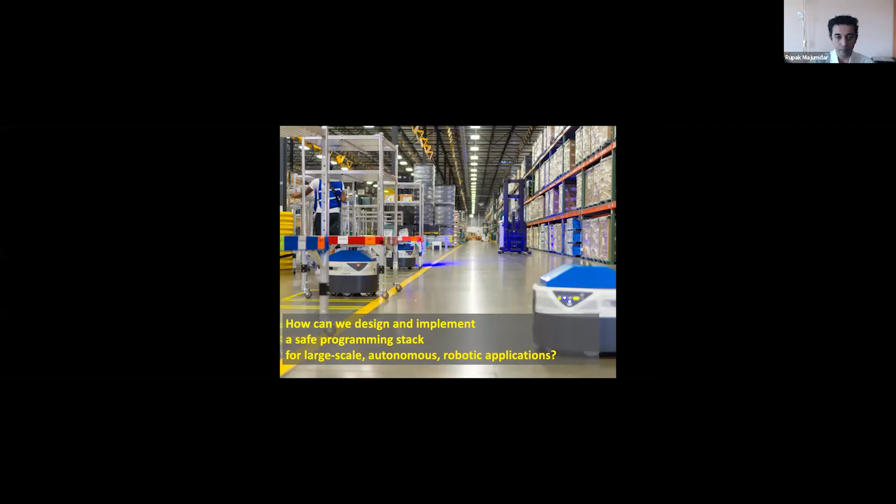So the problem that we want to look at is how can we design and implement a high confidence and safe programming stack for large-scale autonomous robotic applications. This is a rather long-standing challenge in many different communities.

There is this very influential paper by Tomás Lozano-Pérez from 1983, where he claims that one of the great challenges in robotics is to provide programming abstractions that allow the versatility of robots to be exploited easily. He ends his paper by stating that we do not have an understanding of the basic issues in robot programming. And what I would say is that even after 40 years, we still do not have adequate understanding of programming and reasoning support for these autonomous robotic systems. But what I would like to convince you in this talk is that over these years, we did make sufficient advances towards this grand challenge.

So even though we haven't solved this problem entirely, we have made considerable progress. And by the nature of these talks, I shall provide a rather biased view that will feature the work of my group. But of course, there's a very large community working on all of these problems.

Just to show you the kind of examples that we can now verify, let me give you a couple of examples of some simple robot coordination protocols we have implemented in the lab. So here, essentially, there's a cart that's carrying blocks of different color to different robots. As a robotics example, this is not particularly exciting, but what is exciting to me is that this entire code is actually formally verified.

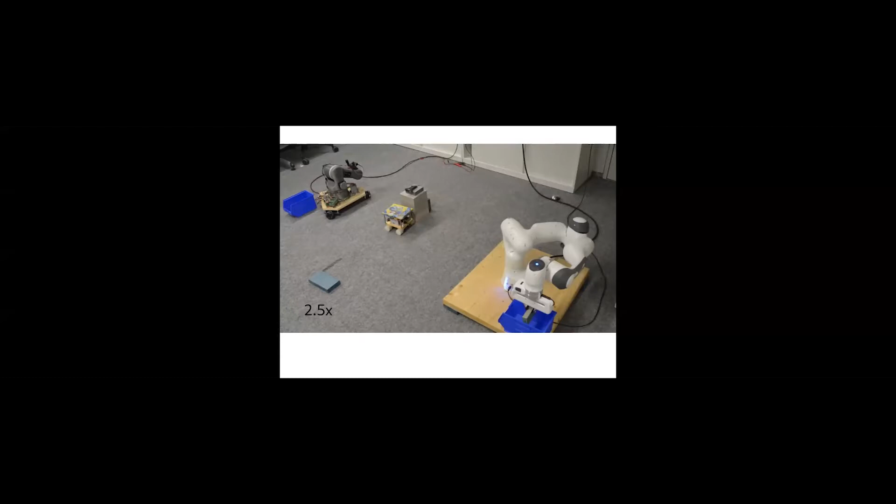But people are asking whether you could enlarge your screen because it's relatively small. Let me try. Is this any better? Didn't change for me - it's relatively okay, but I saw some people complaining. Let me stop the sharing and try one more time. Okay, absolutely, no big deal. Does this work any better? Much better. Yes. Thanks.

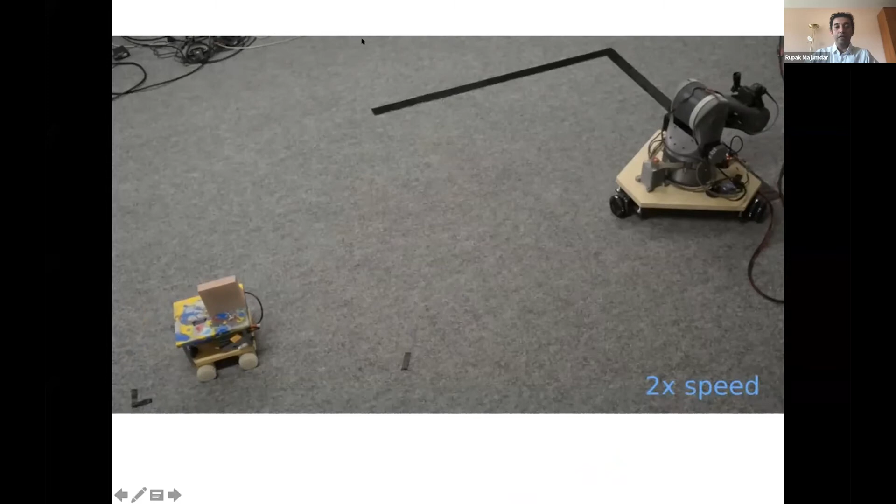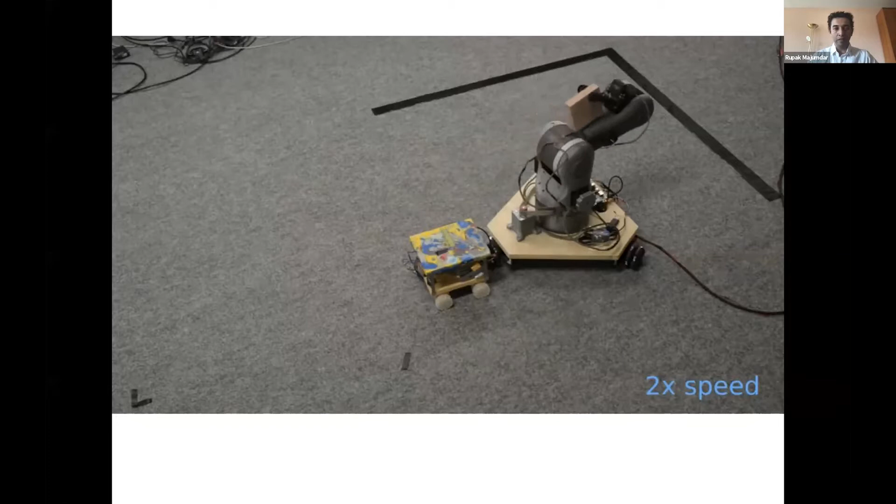Okay, so here's a second example, again a very simple coordination where two robots meet somewhere in the middle and transfer a certain block from one cart to another one. Again, in terms of concurrent robotics, these are not very complicated examples, but considerable work needs to be done in order to verify these simple coordination protocols.

Now, before we go any further, I want to mention that this problem of understanding and providing a formal foundation for robot programming is an extremely interdisciplinary topic, in the sense that we need to put together many different ideas from many different disciplines - from continuous systems theory or control theory, to computer science and discrete systems theory, ideas such as automata and logics. As you will see, we also look at programming abstractions and concurrency theory. And finally, I will give you some examples of software engineering and human-robot interaction that come together in making progress on this problem.

So essentially, this is a rather interdisciplinary topic, and I apologize in advance if I lose some of you in some parts of the talk. It's really a struggle for me as well in trying to understand all of these things and how they come together.

Now, when we talk about formal foundations, essentially we shall look at three different things in this talk. We shall look at reasoning about dynamics, reasoning about coordination, and to a lesser extent, reasoning about resources. And when I say reasoning, I will take a computational lens. Our goal is to provide an algorithmic framework for the design and analysis of these systems.

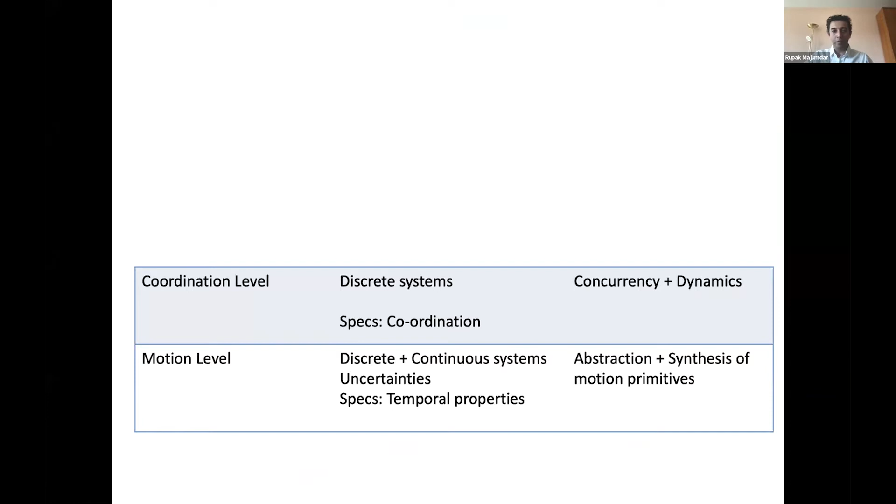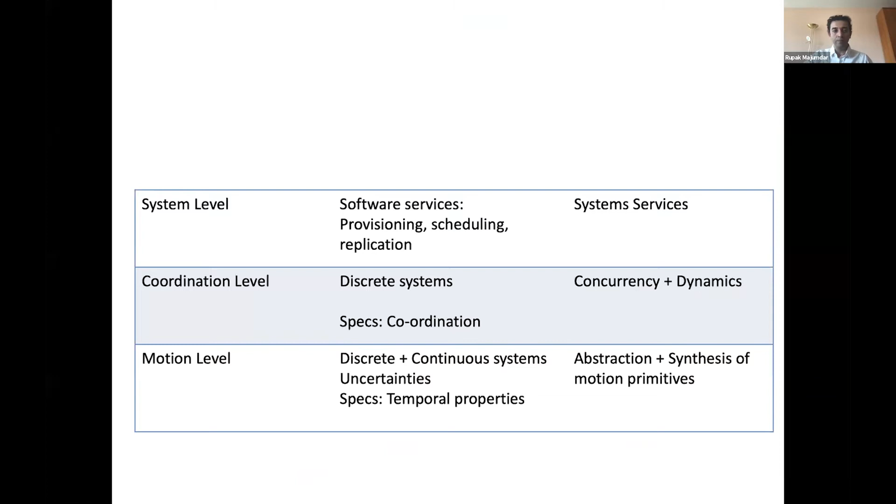Now, when we go further up, we shall look at multi-agent systems. And these systems will not just work in a vacuum. We shall look at software engineering and systems design issues such as provisioning, scheduling, and so on. And finally, if time permits, we shall very quickly look at certain user interaction issues and how end users can use these systems in a more effective way.

So most of my talk will actually focus on the bottom two levels, mostly because we have made more progress at these two levels than the other ones. But I will give you a very brief introduction to what we have been doing at the other levels.

And I shall structure the talk in terms of 4 projects that we have been doing in my group for the last few years. Mascot is an automatic controller synthesis tool. PGCD is a programming framework for concurrent robots. AntLab is a task assignment and planning system for robots. And LittleTalk is an end-user programming by example system.

Okay, so let's start at the lowest level. I shall talk about automatic ways of designing controllers in the presence of continuous and discrete dynamics.

Now, the controller synthesis problem is probably familiar to many of you. So you're given a model that is, let us say, a continuous state, continuous time dynamical system given by a differential inclusion. And there is a nominal or unperturbed dynamics, but we also assume that there is a bounded external perturbation. So we have some state space.

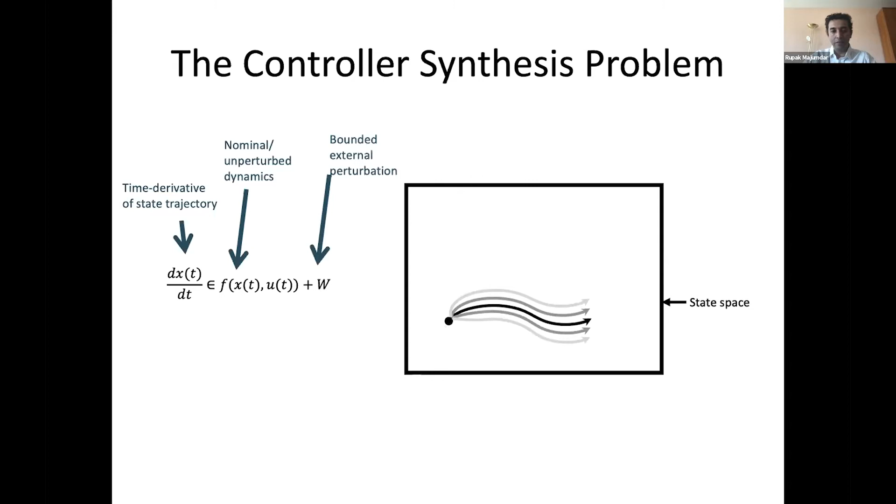Let us say it's a compact state space. You have a certain point, and under the effect of the external disturbance, the system essentially gives rise to a set of trajectories.

And what we'd like to design is a controller that takes a state and produces a control input to this dynamical system, such that the trajectories of the system under the influence of the controller satisfies a certain specification, which is usually in our context given by a temporal logic over the sequence of states.

And our goal is to find a controller domain, or at least a good approximation to this controller domain, such that from every state in this controller domain, if you apply this controller, then you ensure that every possible trajectory, even under this bounded external perturbation, will satisfy the specification.

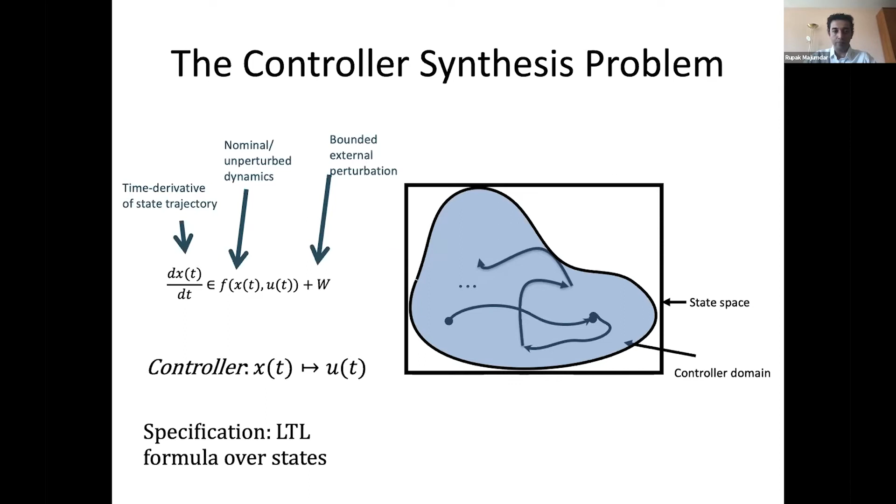And again, the goal is to find a controller such that the dynamics that you get under the controller, even under the disturbance, will eventually reach the target, and it will never hit the obstacles. And our goal is to, again, find the set of states from which such a controller exists.

And another very canonical example is safety, where again, you're given a dynamics, and the goal is to come up with a controller such that the trajectories always remain outside some set of bad states. And in general, we can look at any omega regular specification or things given in linear temporal logic, if you're familiar with such logics.

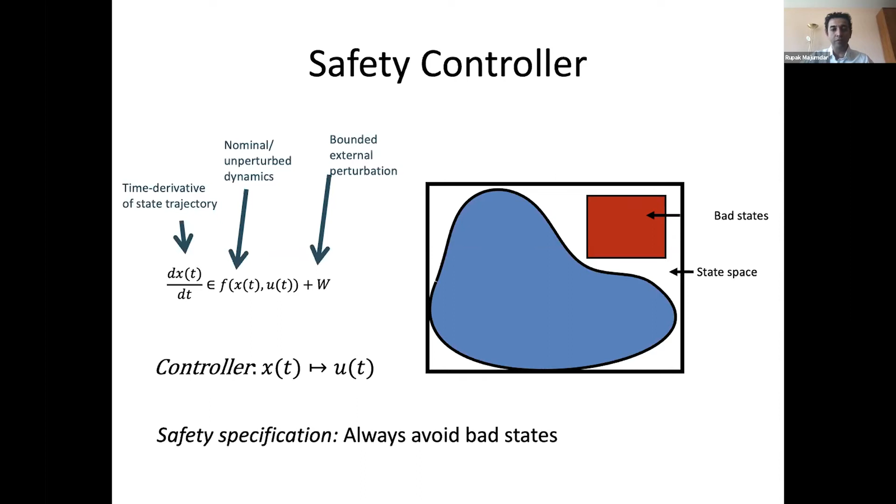Now, the core technique that we use is by now quite familiar in the community. This is something called abstraction-based control design. This came out, I would say, from the HSCC community, from the intersection between computer science and control theorists about 15 to 20 years ago. And by now there are some excellent textbooks, by Paulo, by Calin, by Sayan, that essentially talk about abstraction and control design in various ways.

So ABCD starts with the continuous state dynamical system. In general, it can be both continuous time or discrete time. Here, I've just given a discrete time description of the system. And what ABCD does is that it first computes an over-approximation of the dynamical system on a finite state space.

So the simplest way of thinking about this abstraction, this finite state space, is that you put a grid on your continuous state space, and then your finite state space is given by the cells that make up this grid. And then through a process of abstraction, what we do is that for every center point of every grid, that is for every state in my finite state space, I construct an over-approximation of the underlying dynamics.

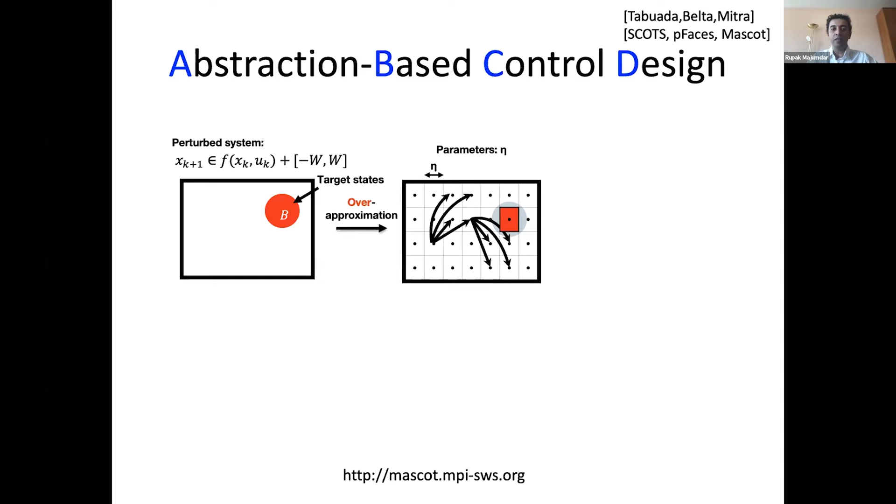So in this picture, if you start with any one of these dots and you follow the arrows, what we can say is that if the underlying continuous state system takes one step in its dynamics, then under the effect of the disturbance, the possible states would be any one of these discrete cells that these arrows point to. It's an over-approximation of the possible states that you could visit in one step of the underlying dynamics. And this abstraction is characterized by a parameter that says how fine your discretization is.

Now, it turns out that there is a different way of thinking about this abstraction, and this is something that is called a two-player game. It's a two-player game between the controller and the disturbance. And you should think of it in this way: the states of this game are the discrete abstract states that we have computed in this abstraction.

And from any one of these states, the controller can decide to play any one of its control actions. We shall also discretize the control space in the same way that we do the state space. And then an adversarial player, the disturbance, essentially resolves the disturbance and figures out which new state the game ends up in.

And now it turns out that the reason we go to these two-player games is because there's a lot of theory from the world of reactive synthesis and automata theory that tells us how to compute strategies that win against omega regular specifications on discrete two-player games. So essentially what we can do is apply these algorithms, and we can essentially find a winning domain of the controller on this discrete abstraction.

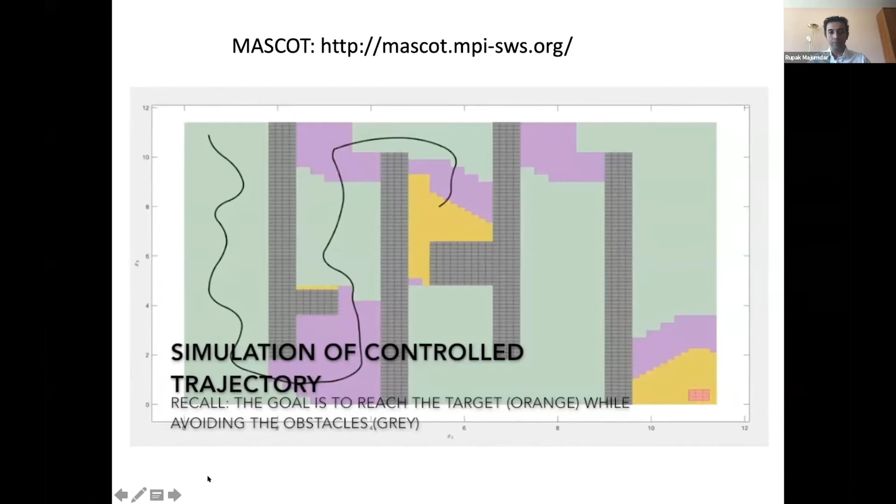Let me talk a little bit about some very recent work we have been doing in applying the same ideas to stochastic models. Here again, the problem is more or less as before: you're given a dynamical system.

So you're given a dynamical system, which is continuous state and either continuous or discrete time, and you're now given a perturbation that is stochastic. Again, our goal is to find a controller that looks at the state and produces an input. We are given a specification, which is again a linear temporal logic formula over states.

Our goal is to now find a tight bound on the satisfaction probability of the specification. Since the system is probabilistic, we cannot guarantee all the time that a particular specification will always hold on all trajectories. But we can ask, for example, can we find a controller such that the specification holds almost surely? Or can we find all those places from which the controller ensures the specification holds with probability greater than, let's say, 90%.

Now, the way we handle this problem is we essentially look at the special case of almost sure satisfaction. So what we do is find a controller domain from which there is a controller that ensures the system satisfies the specification with probability 1. And then we run a value iteration like algorithm to compute the probability that we can reach that set of states.

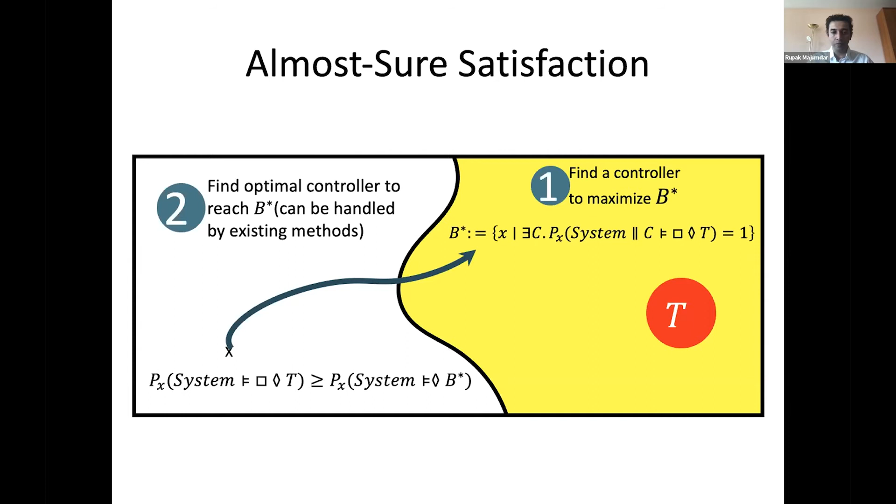Essentially, we can show that if you compute this region and then do a reachability analysis, what you get is a lower bound on the probability of satisfaction of this formula. And again, what we can do is take the basic ABCD algorithm and essentially massage it to deal with the stochastic case as well.

The way we do this is that instead of maintaining just one abstraction as before, which was the over approximation of the dynamics, we now need to maintain two different abstractions: one which is an over approximation of the dynamics, and the other is an under approximation of the dynamics. There's a technical reason why you need both, because of the way probabilities work.

Once you have these two abstractions, you can again go to a class of games for which we know how to solve omega regular objectives. But this time, the game you get is not a 2-player game as before. You get what is called a 2.5-player game.

These games have been studied in the automata theory literature for some time now. The idea of a 2.5-player game is that you have two adversaries as before, the controller and the disturbance, but in addition you also have nodes that are random. So in that sense, 2.5-player games generalize Markov decision processes to the competitive setting, where you have the controller, the disturbance, and also a probabilistic player that decides where to go next based on a probability distribution.

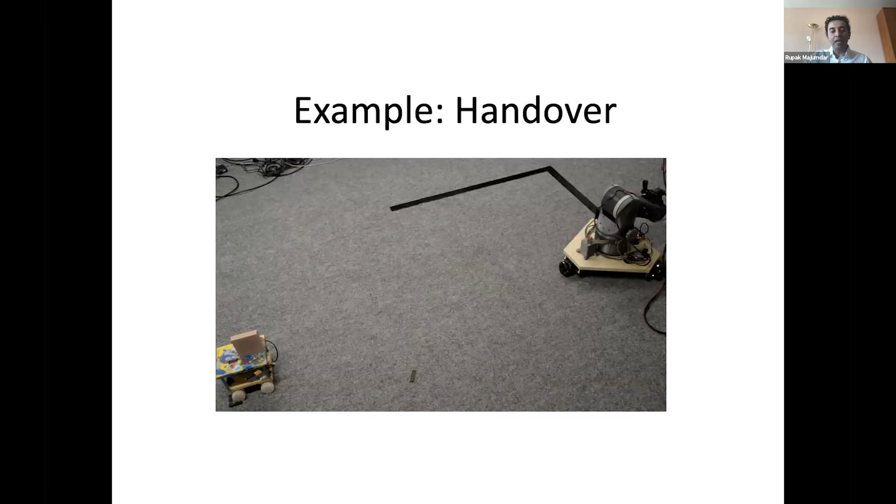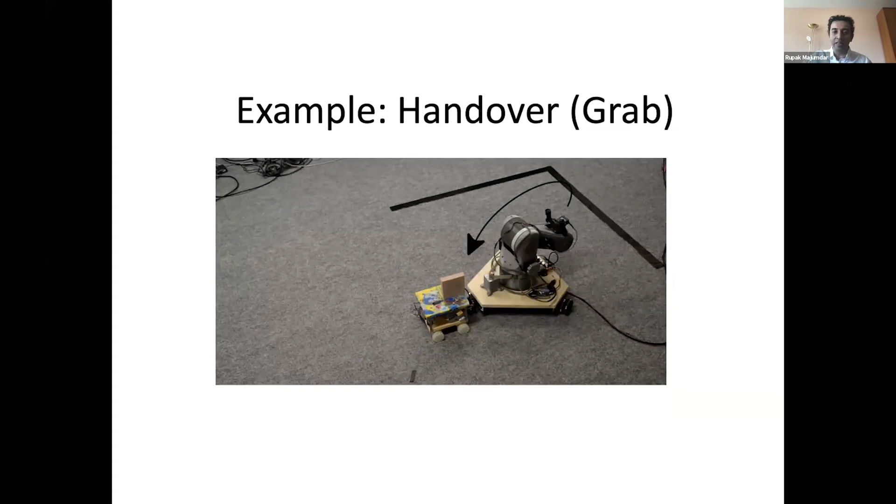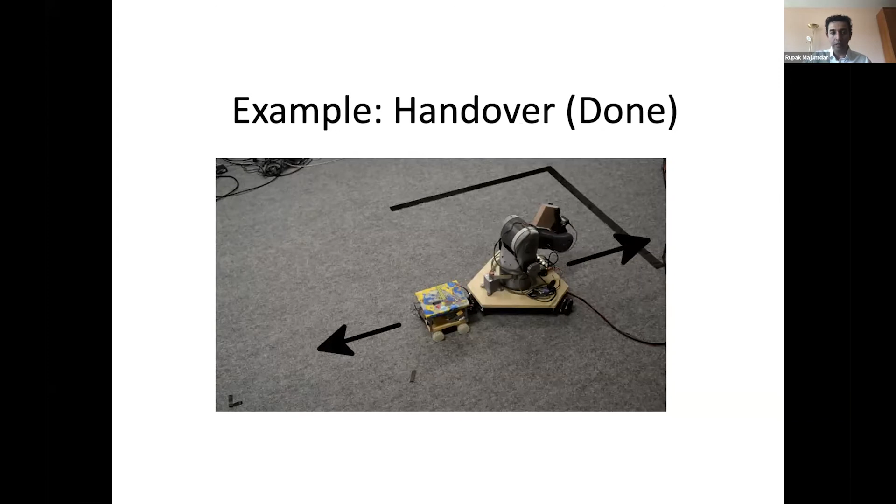Going back to the handover example we saw in the video: it shows this connection between motion. The two carts moved towards each other, coordinated, stopped next to each other, and then the arm came and picked up the object. Once the arm was done picking up the object, they went back to moving away from each other.

So essentially, the run of this kind of handover program, and many other programs where several robots are interacting, has the following form over time: they send each other messages for coordination, and between the messages, they execute motion primitives that cause global time to progress. You can think of these motion primitives as a dynamic controller that you may or may not have designed using abstraction-based control design.

But there's an additional aspect of making sure these messages and synchronization happen in the right way. In our model, we assume messaging is synchronous and reliable, and takes zero time, as does any other computation. The only way time can progress is when these motion primitives are executed. Because we're looking at multiple robots, each has essentially coupled control dynamics, so the dynamics of the cart can be affected by the arm sitting on it. The difficulty in the verification problem here is dealing with motion alternating with these messages.

So the unit of software in PGCD is a process, and a process has two aspects: the physical aspect of the robot, and the software. The physical aspect talks about the physical state maintained by this robot—for example, the position and velocity of the cart, as well as its mass, and the mass of an object sitting on it.

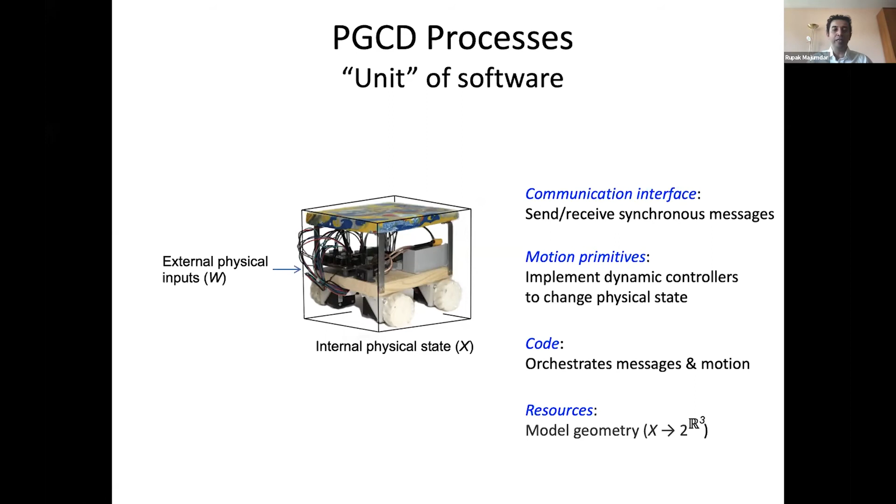So the code that runs on this component will orchestrate the message and the motion. In addition, we also carry around the geometry of the robot, a resource we track in our verification. The geometry is used to make sure two robots do not collide in geometric space.

Now, PGCD takes a rather abstract view of the underlying controlled dynamics. Essentially, this is the classical program analysis or program verification perspective, where we think of each motion primitive as summarized by its precondition and postcondition—under what states this motion primitive can be executed, and what happens after it has executed.

In addition, it carries around an assumption on the physical state variables of the environment that affect this controller, and gives a guarantee on what the external world can rely upon while this motion primitive is being executed. There's also the footprint and the duration: the footprint carries the geometric space required for this motion, and the duration is needed because at some point we want to reason about the interaction between motion primitives and messages.

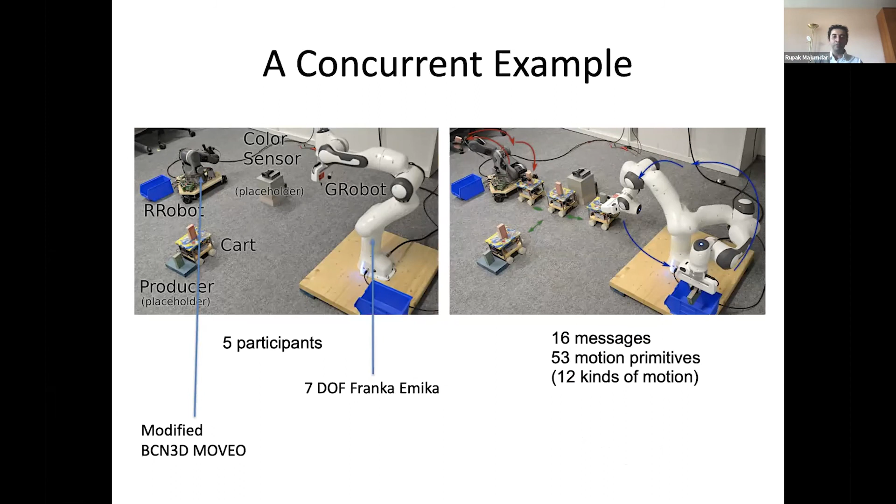To show the complexity of this coordination, there are 5 participants, including some robot arms we bought and others we built in the lab. The coordination had 16 messages and 53 motion primitives.

The whole point is to show that the annotation burden isn't very high. We have to give specifications of the motion primitives as well as write down the global type, and we can automatically verify this on top of an SMT-based verification condition generator and verifier. Most of the time goes into the joint compatibility checks, partly because the geometric reasoning requires nonlinear arithmetic, and that's where the SMT solver really needs to do some work. But the typing and syntactic checks are really minimal in the whole verification process.

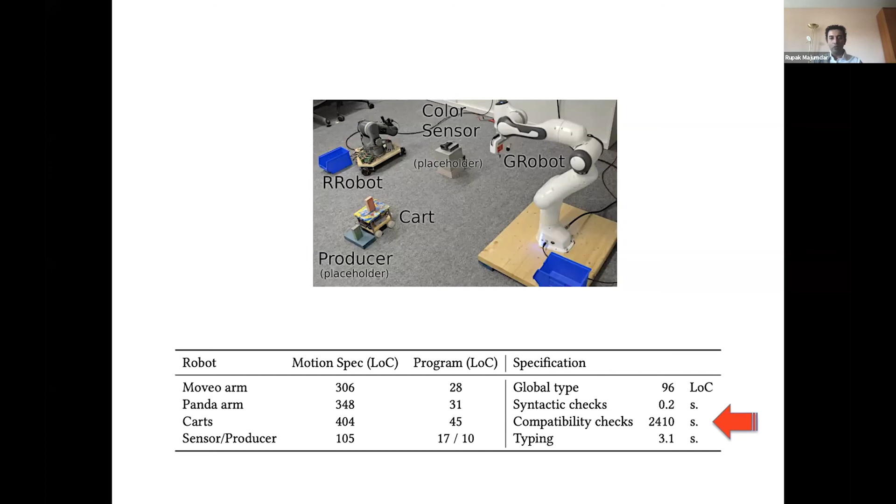I'm going to move to the last part of the talk where I'll briefly talk about the rest of the projects, but let me stop and take a couple of questions now.

So Paritosh asks about the scalability-expressivity-annotation trade-off. Instead of doing a completely automatic model checking on the entire state space, we ask for type annotations and also for pre/post assumes and guarantees for the motion primitives. This isn't always easy to give, but that's the trade-off. We're scaling to somewhat complicated examples because we're asking the programmer for help with these motion primitives and global types, and we're using session types, which are sound but not necessarily complete. So it's possible the session types will reject a program that is actually correct.

Manuel asks, why not use timed automata for the planning of messages and actions? We went for the type view because we wanted a compositional way of looking at the system, and the types came with a compositionality result. Whereas for timed automata, we'd have to somehow come up with a way of doing this projection on timed automata—it looks rather interesting, but I don't know offhand how easily we'd be able to do this.

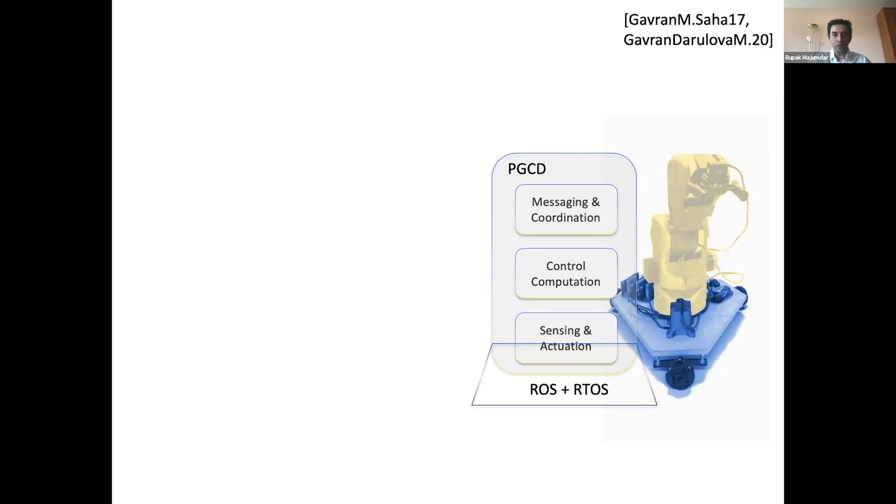But if you want to create a large-scale robotics framework, this is only part of the story. There are many other things you have to do before it becomes useful, for example concurrency management, provisioning robots, failure recovery, managing the state of the entire system, as well as things like lifelong task planning.

Usually in many of these situations, there will be a continuous stream of concurrent requests that come to the system, and there's a task assignment and planning phase that has to decide how to take a task and give it to a robot.

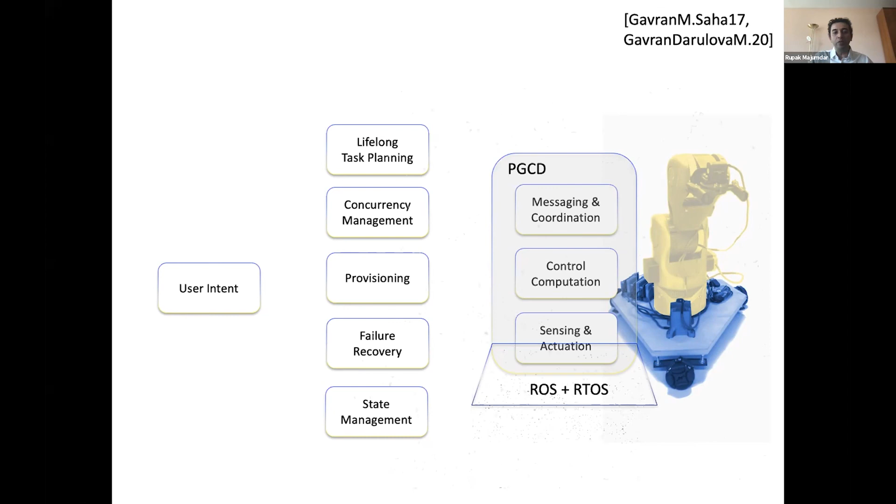And finally, there's also the question of how you take user intent and translate it to a system. If you want end users to be using these robots, you cannot assume that they know all about linear temporal logic. Most linear temporal logic experts do not know a lot about linear temporal logic when it comes to expressing tasks. I will very briefly talk about two projects that we have looked at in this world.

AntLab is essentially a project that tries to add this kind of software engineering infrastructure on top of these robot programs. Part of the research in AntLab is to look at different kinds of planning problems that come up in these lifelong planning situations.

You have a robot that is already going to a certain target and a new task comes in. Will you interrupt the robot so that it just goes a little bit out of its way to tackle this task as well? Or do you give this task to a completely new robot? Or do you wait for this robot to finish its task and only then take a new one? There are very nice planning problems that show up through this AntLab project.

And the other project, this LtlTalk, is the one I want to spend a little more time on. This is essentially trying to get user intent through natural language and demonstrations. We do this in a somewhat idealized setting where you have this gray robot in a world with different items with shapes and colors and different rooms and so on.

What we'd like to do—let me just show you a demo of the system—is have the user be able to write down natural language requests, and these should be learned or understood by the system. Underneath the system, there is a certain stylized form of linear temporal logic.

For example, you can say things like eventually pick one circle item at a certain location. But of course the user may not know this particular syntax—they could just say 'get one circle item from some location.'

Now, if you get something like this that the system does not understand, what we do is ask the user to show a demonstration in this world. The user shows a trajectory of what happens, and then the system interactively asks the user for certain instances. The system says, 'Does this satisfy your constraint?' and the user can say yes or no.

Essentially, the system disambiguates the particular property that was shown, and now the system learns what the user intent was. The user intent is essentially learned as a linear temporal logic specification.

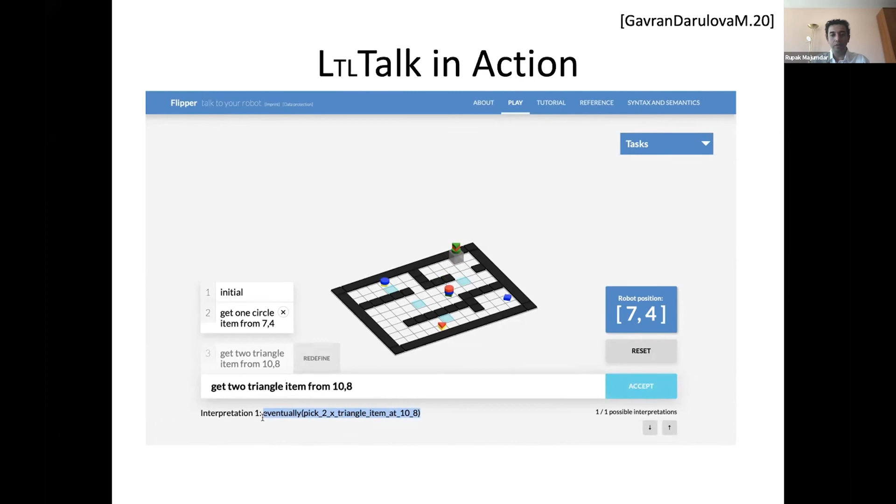So this was roughly the last thing that I wanted to talk about. We are almost towards the end of my talk.

Initially I showed you all these different fields and I kind of put them together. In practice, these fields are not really that close, and you have to do quite a bit of work in order to bridge this gap.

Finally, I only talked about certain small problems in control design and programming abstractions and so on. There are, of course, many other problems in this domain that have to come into the formal foundations of robot programming. I mentioned a little bit of software engineering. There's also this entire area of simulation, testing, and verification. There's human-robot interaction, mechatronics, devices and sensors, and so on. And there's, of course, the elephant in the room: machine learning and data. How do you make these formal foundations compatible with learning and data?